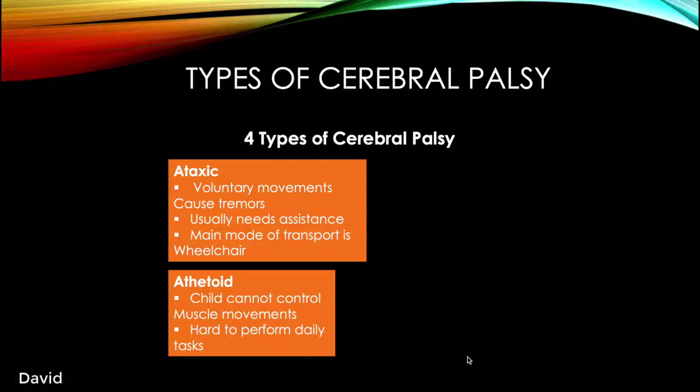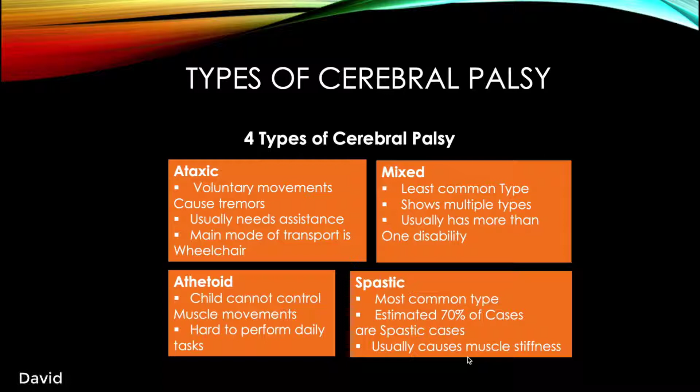Cerebral palsy is characterized into 4 types. First type being ataxic, where the kid gets tremors when doing voluntary muscle movements. Athetoid, where the kid cannot control their movements. Mixed, which is a combination of any of the 3 that are shown here, as well as spastic, which is the most common type, an estimated 70% of all cases, and this is what our project is based off of. Cerebral palsy is then further broken down into stages.

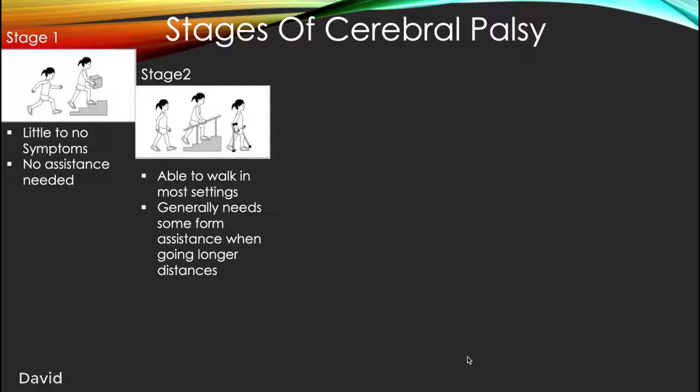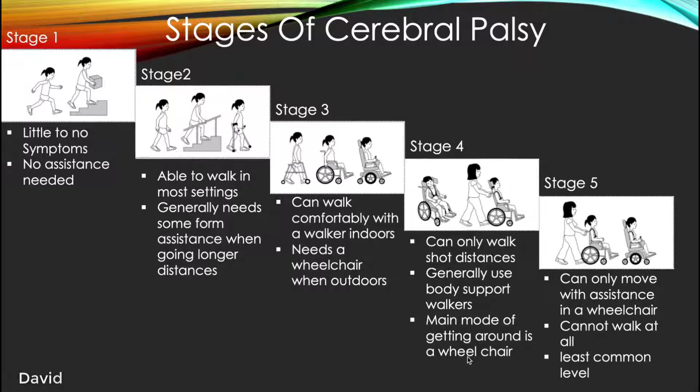The first stage is where the child shows little to no symptoms. Stage 2 is where the child can walk in most settings, but generally needs assistance with a walker when they go from A to B. Stage 3 is where they walk comfortably with a walker inside, however need a wheelchair to do long distances outside. Stage 4 is where they can walk very short distances and generally use body support walkers and wheelchairs. Stage 5 is where they need full-on assistance to get from A to B.

It is estimated that 1 out of 345 children are diagnosed with cerebral palsy globally. Not only does cerebral palsy affect the child and their interactions on a day-to-day basis, it also has a huge impact physically, emotionally, and financially. Here's a cost breakdown of the yearly healthcare costs for children in Canada from birth to 19 years of age.

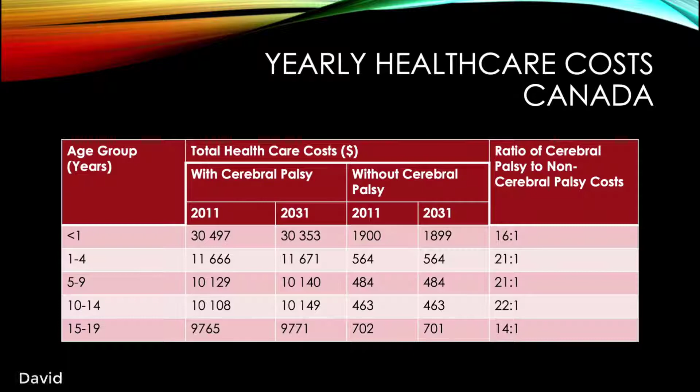Imagine if you were a parent and you could not teach your kid how to walk, how to skate, or even bring them to the park for a game of catch. Not only does this impact the relationship you would have with your kid, this would also impact their social life, and they would lose out on the viable skills necessary for us to build relationships as adults. Cerebral palsy impacts the lives of every individual involved, and having a tool that would allow your child to do the activities that every child has a right to would also provide you with the ability to take your kid out to the park for that game of catch.

Our overall objectives were safety, performance, appearance, and costs. For safety, we wanted a walker that was not only safe for the user, but also safe for the environment. In performance, we wanted a walker that was easy to use, easy to maintain, and convenient for the operator. For appearance, we wanted a walker that looked premium and was comfortable for children. And finally, we wanted a walker to have a low overall cost to support families in need.

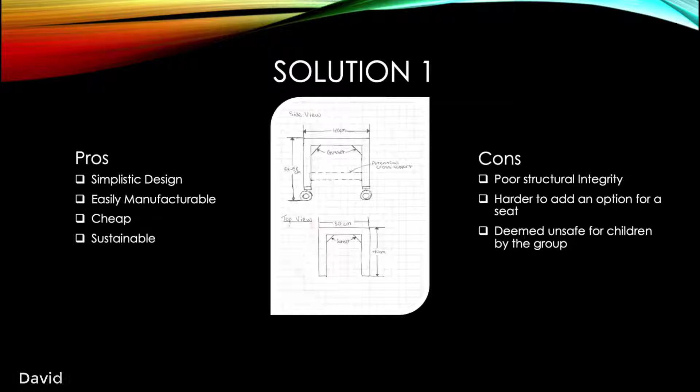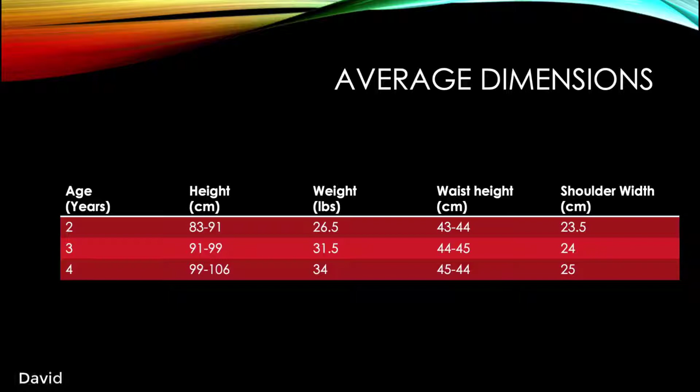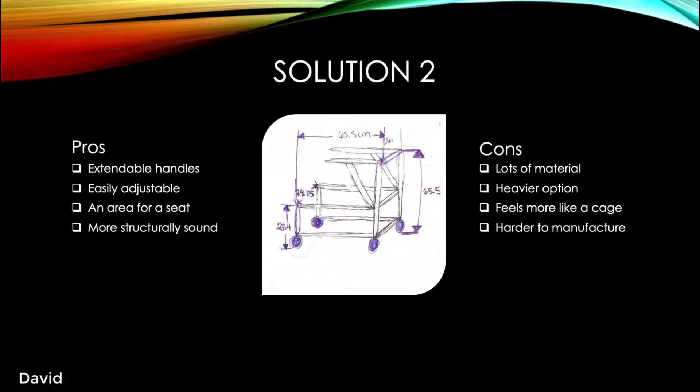For our solutions, we followed the rigorous design process, starting with research and ending with improving on what we had found. Our first solution was a simple design and was easily manufacturable. However, its simplicity was its downfall in overall structural integrity, and we deemed it unsafe. So we went back to the drawing board and we researched a better design and imagined a better design. For this solution, we used the first solution as our base and added extendable handles and made an overall stronger design. However, the amount of material and the cage-like feel and experience drove us away. So we went back to imagine and came up with the Airwalker.

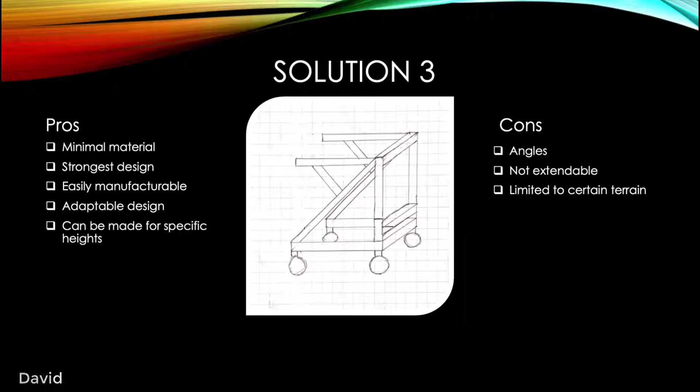For the Airwalker, we created a prototype which used less material than its predecessor, was more structurally sound, and had an overall better appearance. The dimensions were chosen based on researching the average heights and dimensions of the children. The width was set to 1.5 times that of the shoulder width. The height is just above waist height for comfortability, and the length was chosen to help the kid not feel so encaged from their surroundings.

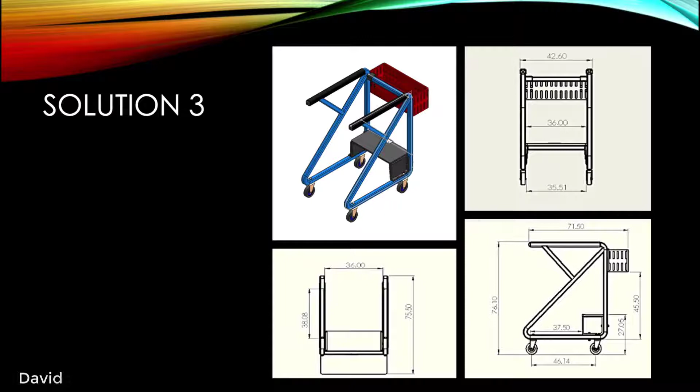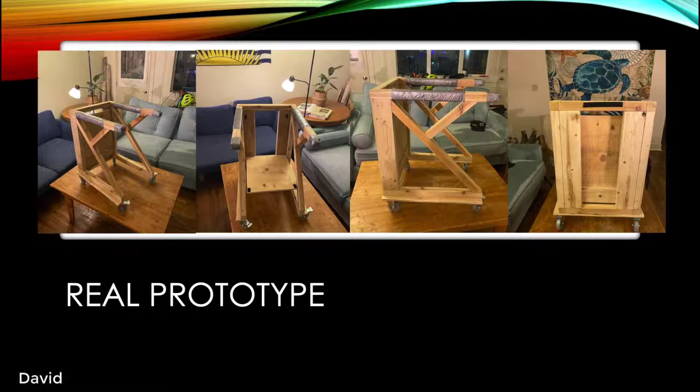For the prototype, we chose to go with wood. This was due to the limited resources and finances that were available to our group. We were able to build the prototype almost identical to the 3D model that was created. The dimensions and look of the design that we have in front of you mimic almost every aspect. Here we have a function overview going over each function that the Airwalker can provide.

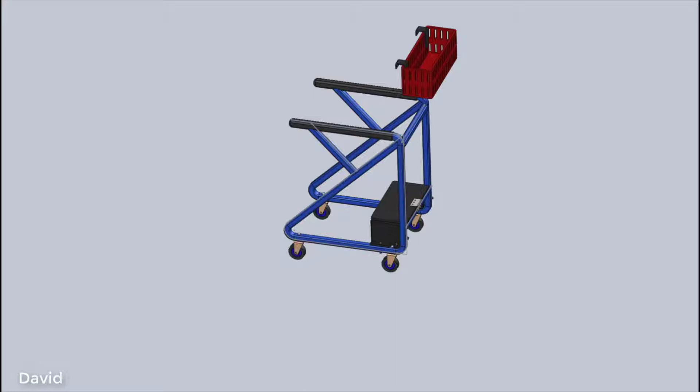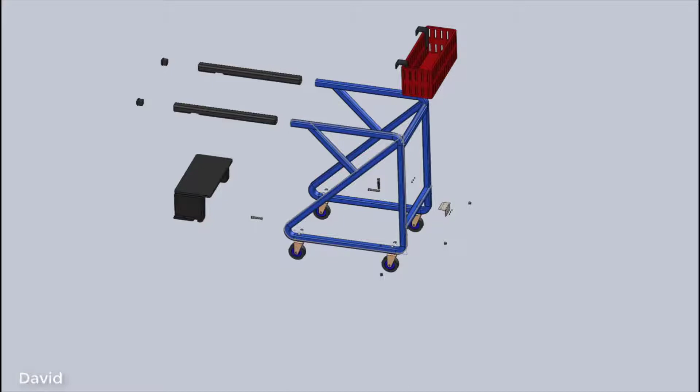In SOLIDWORKS, we built the frame out of aluminum alloy, which is a cheaper, robust, and well-rounded aluminum. We created a detachable basket to allow children to pack around their toys, which can also be easily removed if not needed. We added 2 rubber stoppers and grips to provide comfort and safety for the child. We added 2 braces, a seat, and a hinge so when the child is tired they have a place to rest. Finally, we added 4 wheels that swivel in all directions, made out of rubber to roll in rough terrain, and 2 that have locking mechanisms for when the chair is being used.

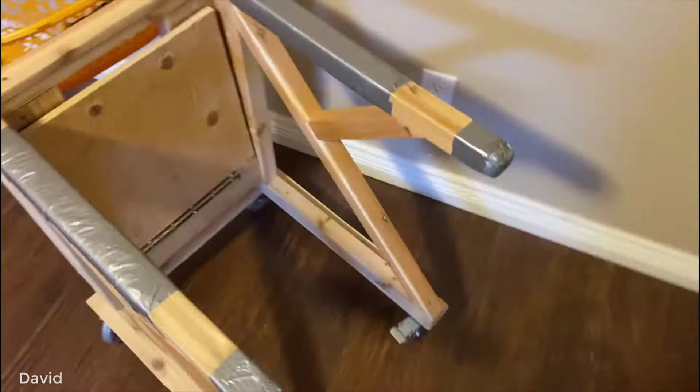Due to the lack of resources and limiting budget, we built our prototype out of wood. This allowed us to mimic almost every aspect of our CAD design. We added 4 wheels that swivel in all directions, 2 of which have locking mechanisms in the front for safety.

We also added cloth wrapped in duct tape to mimic the rubber grips and stoppers from the CAD design, as well as we have a foldable chair that folds with a hinge and is attached by Velcro. And to top it all off, we have a detachable basket in the front, which is able to hold the toys for the child.

From this video, you could see that the walker is very stable when the wheels are locked, and it can sustain a weight of greater than 175 pounds. As you can see, the chair holds my weight, and now Braden's going to take it away with the economical considerations of this product. Some design concerns we had to address when designing our walker.

The first of these concerns was safety, which was of utmost importance because of the walker's purpose being a medical device, so it being unsafe would be counterproductive. The first way we addressed the safety concern was by making the walker out of aluminum. That way, the walker wouldn't collapse under the weight of the user and cause serious bodily harm.

The second way we addressed this concern was by making sure there were no pinching, cutting, sharp edges, no kind of hazards like that, so that the user wouldn't be brought to harm by the walker itself. The third way we addressed this concern was by making the wheels all-terrain, so that whatever the conditions are, the user could use the walker without there being any chance of the user being endangered.

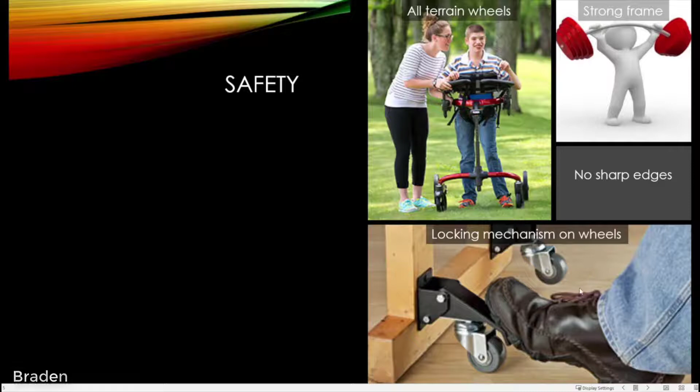The second concern we had to address was that of an environmental concern. The first way we addressed this environmental concern was by using the aluminum. We could melt it down so that that material could be reused in something else instead of just being thrown in the garbage. The second way aluminum helped was by being a long-lasting material, unlike something like plastic, so that it could just be used constantly and not have to be replaced every so often, and the expired material had to just be thrown in a landfill somewhere.

The third way we addressed this environmental concern was by making the walker so that it could just be given to charity afterwards, so that if you were done with the walker, then somebody else could use it instead of another walker having to be made for that person.

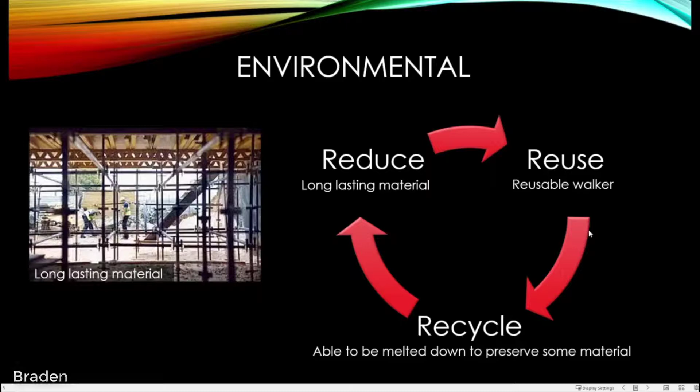The third concern we had to address was that of an economic concern. The first way we addressed this was by making sure enough of the parts were similar to each other to reduce the price of the walker. And the second way we addressed this was by making the walker out of aluminum instead of an overly expensive material like titanium, for example, so that it wouldn't break the bank if the user needed to get a new walker for whatever reason.

The final way we addressed this economic concern was by making the wheels easily replaceable, so that you wouldn't have to take it in for repairs if one of the wheels broke for whatever reason. You just attach a new wheel.

The final concern we had to address was a societal concern. How would this affect the greater society? The first way this is addressed is through the walker's function itself. This gets more people able to move around and interact with the world.

The second way we address this societal concern is by adding a basket onto the front of the walker. That way, users with cerebral palsy could more easily shop and go about daily lives and carry objects without needing someone else to help them out or support them. That's been all. Now I'm going to send you over to Tazrian to talk about some final points.

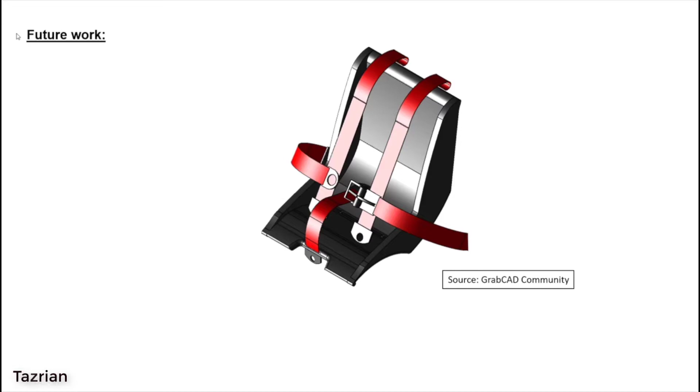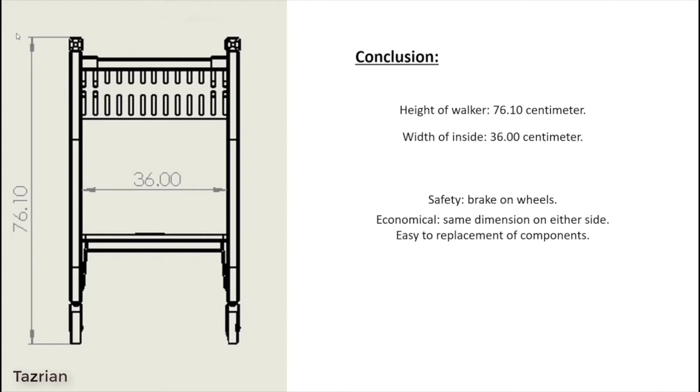Considering the requirement, safety, constraints, environmental and economical issues, our design is the walker for children of 2 to 3 years old suffering from spastic cerebral palsy stage 2 and 3, where they do not need harness support in order to travel. The height of the walker is 76.10 cm and the width inside the walker is 36 cm. Braking mechanism in the wheels to ensure safety of the child. The walker is also very cost effective because of same dimension on either side.

The number of cerebral palsy cases should not be underestimated. With proper information, care, support, people with cerebral palsy can lead a productive life.